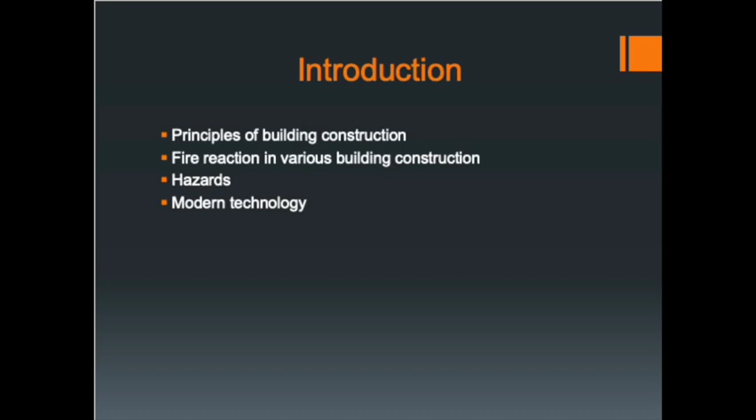So a few things we're going to cover during this PowerPoint are the principles of building construction, how a fire reacts in various different types of building constructions, the hazards involved, and then just some simple terminology to help you understand the language when we're dealing with building construction.

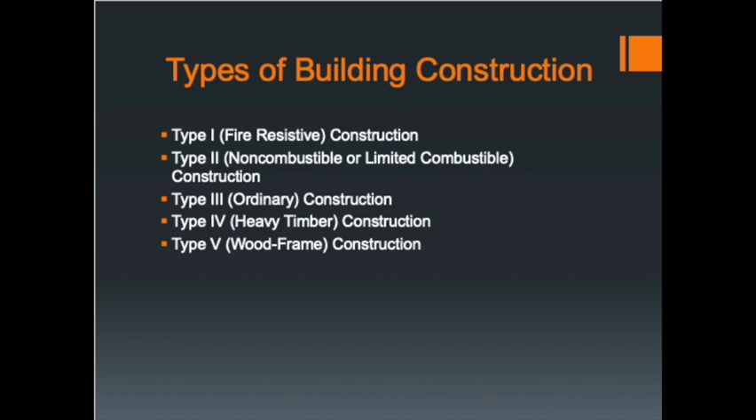So there's 5 types of building construction. Type 1, your fire resistive construction. Type 2 is your non-combustible or limited combustible construction. Type 3 is your ordinary. Type 4 is heavy timber, and type 5 is wood frame construction.

So your type 1, fire resistive construction, in town, these are going to be your high-rise buildings that are newly constructed. Everything in the building will be some sort of fire resistive construction. There will be no wood in the structural members or any of the frame of the building. Everything will be metal, concrete, steel, non-combustible components will be a part of this building.

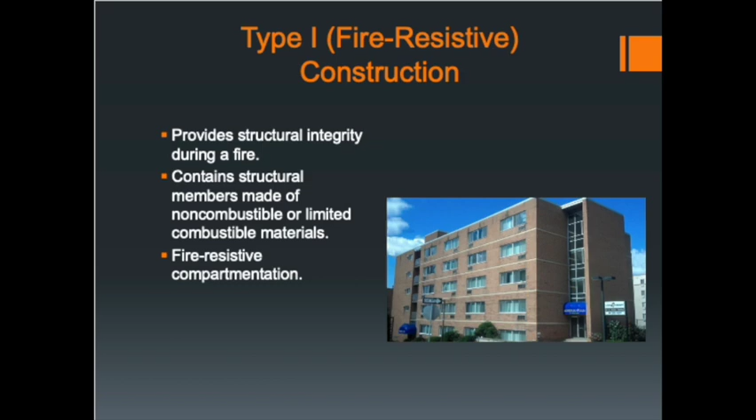So the only real hazard is what the occupants bring into the building. Those combustible members will be the contents that each person brings into the building: furniture, clothing, supplies, whatever the case may be. So with a type 1 construction building, it does allow time for the occupant and the firefighters to get into the building, get out of the building, combat the fire. Type 1 really helps with preventing the spread of fire horizontally or vertically.

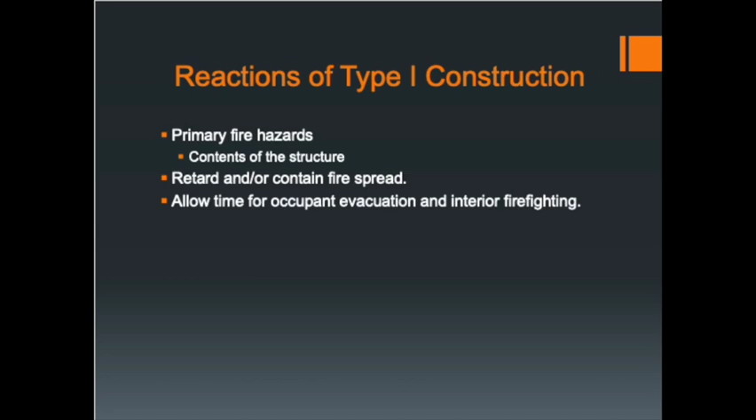So type 2 construction is your non-combustible or limited combustible construction. It is similar in materials that are used in it to type 1 construction, but there's just a lower level of fire resistance on the type 2. It could be from a 3-hour to a 2-hour fire rating, or from a 2-hour to a 1-hour fire rating, just things like that. They may use different materials within the building that will not withstand fire for extended periods of time.

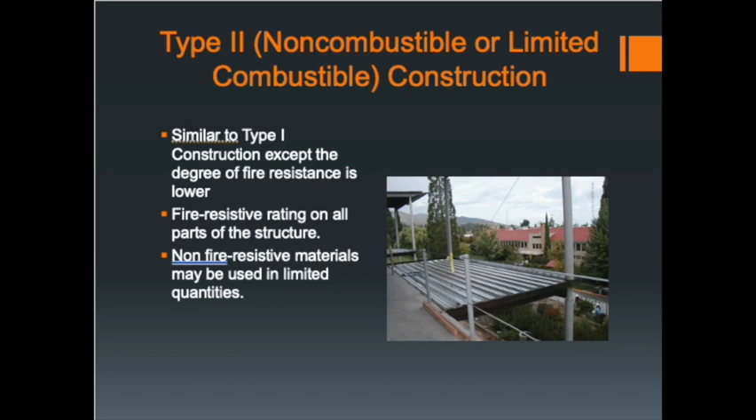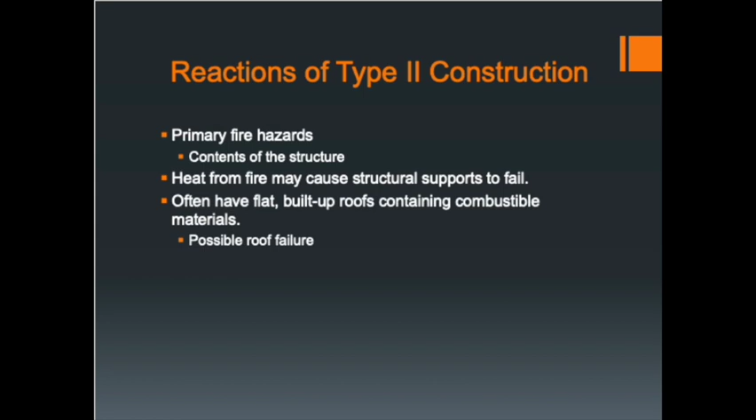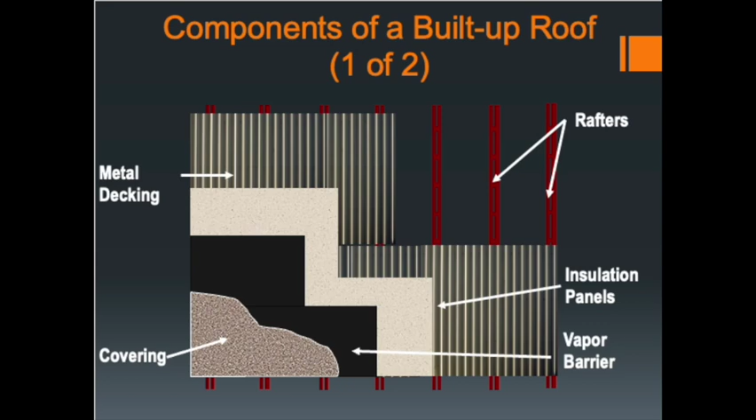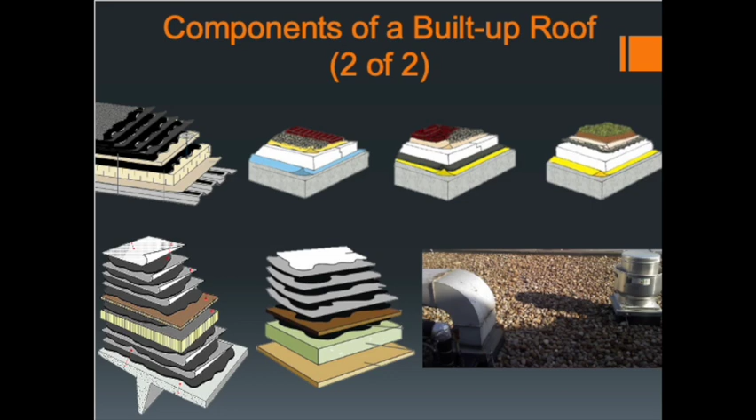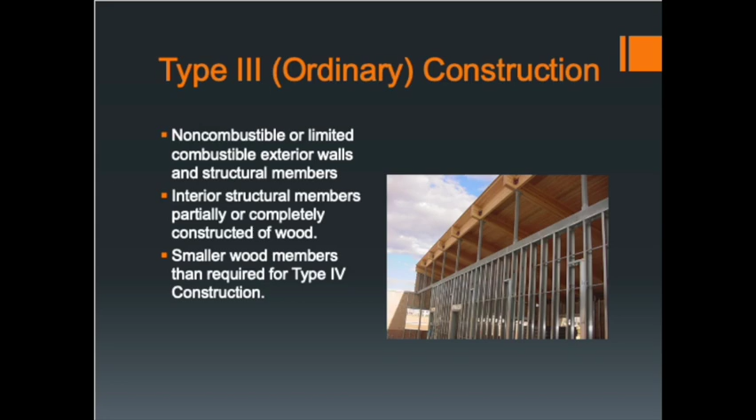So type 3 is your ordinary construction. This is what we're going to have downtown. They call it a taxpayer, which is business on the bottom on the first floor, and then you're going to have your residential living spaces on the upper floors. These are typically a non-combustible exterior and structural members. So the outside and the things that are holding the building up are going to be concrete, steel, metal, masonry, but the interior walls, the partitions are going to be made out of wood. Like I said, most of downtown is going to be this type of construction.

So with type 3, because now you're using wood, different types of materials, you're going to have a greater chance for concealed spaces, which we all know gives you smoke, fire, heat spread rather quickly now. Makes it easier for that nasty stuff to move throughout the building.

And then also the contents inside the building and the stuff that the tenants and occupants bring in is going to be combustible.

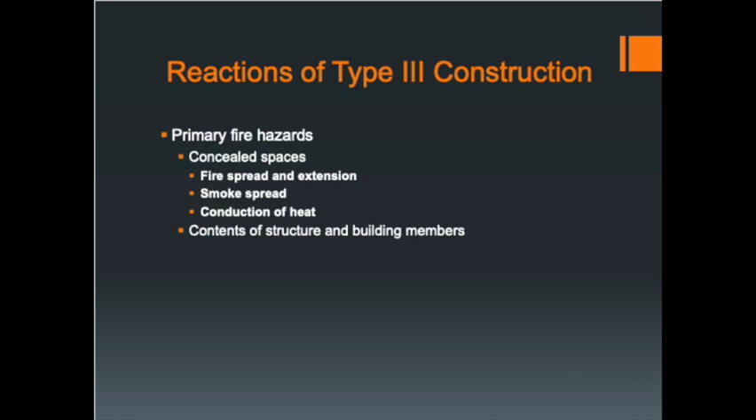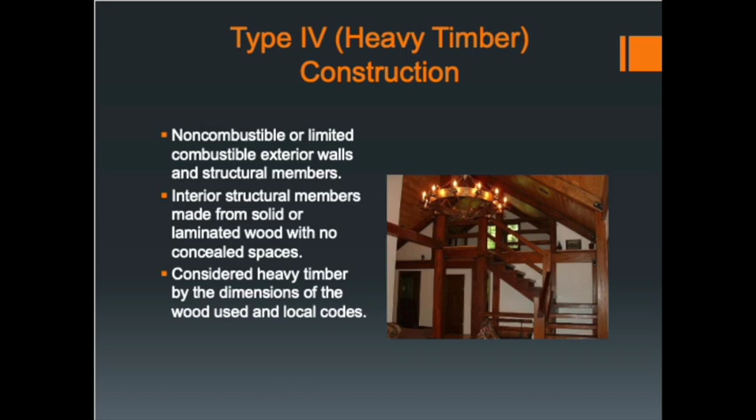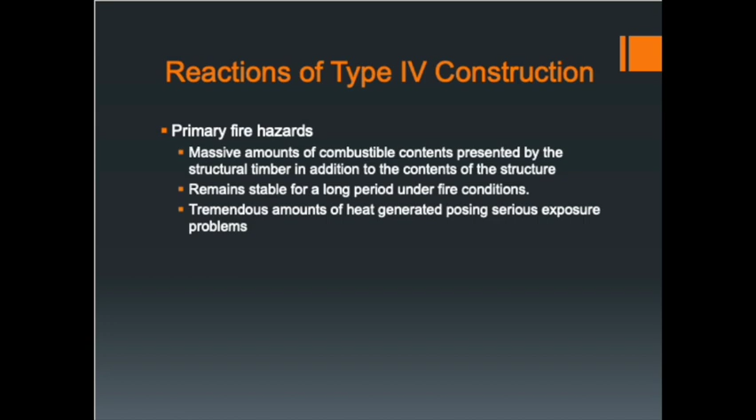So some primary fire hazards in type 4 construction. You're going to have a ton of combustible contents in the building. Structural, non-structural members. There's going to be a lot of combustible materials. Because they're so big, they're so bulky, they're built to withstand the loads. They do remain stable for extended periods of time under fire, but they're not non-combustible. So they will get to a point where things will start to burn and break down.

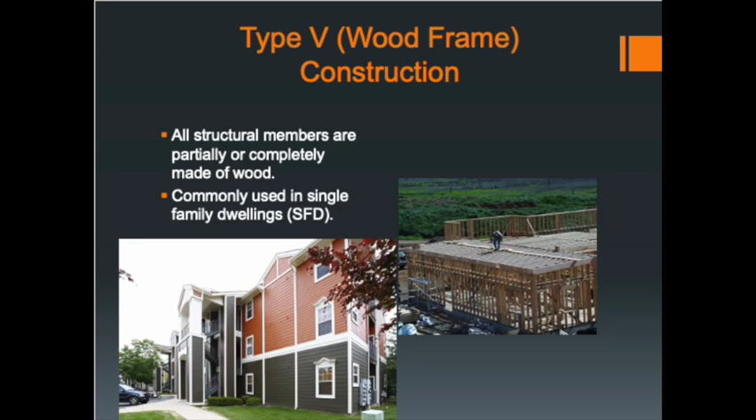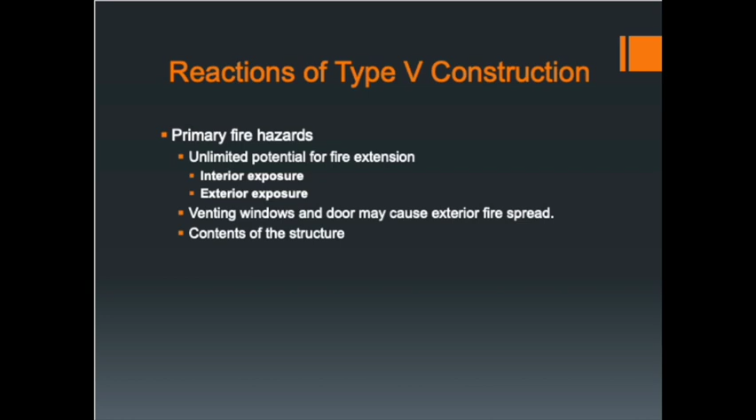So majority of them are going to be unprotected materials. You have ample amount of fire spread opportunities, interior and exterior. Windows, doors, these things will not be rated. And then obviously the contents as well as what the tenants and occupants bring into the building are going to be combustible. So everything that's within this building is going to be combustible, and this is where we see most of our fires and most of our significant fires.

So some common materials used in construction. We've all seen them in town. We've all been to buildings where they've had this type of material: wood, masonry, cast iron, steel, reinforced concrete, drywall or gypsum board, and glass, fiberglass.

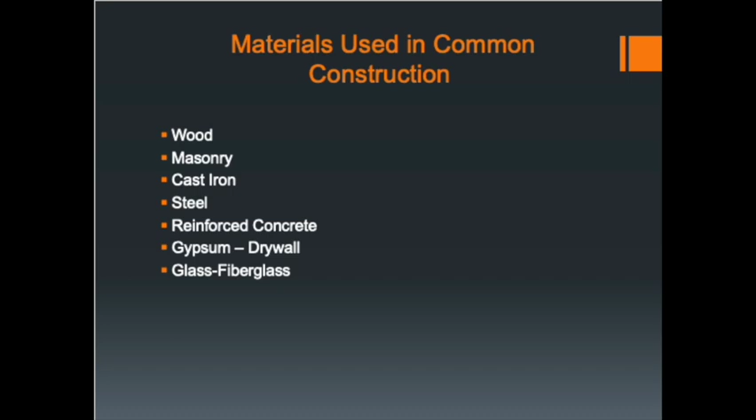So for wood, you can have load-bearing or non-load-bearing walls. Load-bearing walls are transferring weight vertically throughout the building. So obviously if we remove one of these walls or a portion of these walls, something catastrophic could happen. So we need to really pay attention to what walls we're breaching through, things that we're cutting, to make sure we're not making the situation worse for us.

So to go back to that, the 1 and 2, it just shows the standalone platform or may adjoin different structures as a party wall. So on the left, you may have just wood sitting on a wall, or you may have two walls or two boards coming together on that wall to create one continuous.

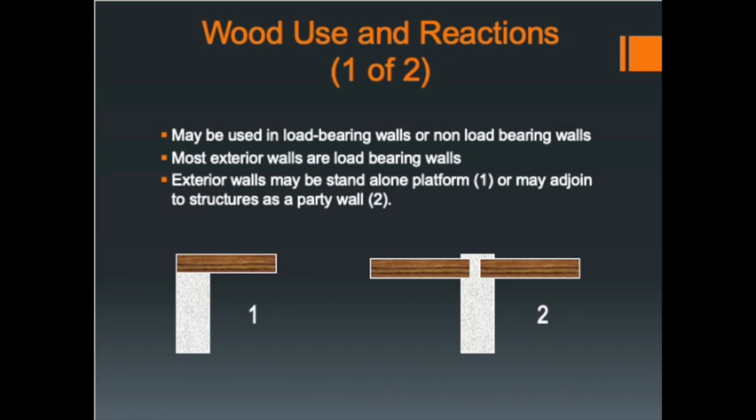So the way wood reacts in a fire, it comes down to the size of the lumber, whether it's a true nominal board or a sawn piece of wood, and the moisture content in the wood. There's a minimum moisture content for it, which is irrelevant, but the more moisture is in the wood, obviously the slower it's going to burn.

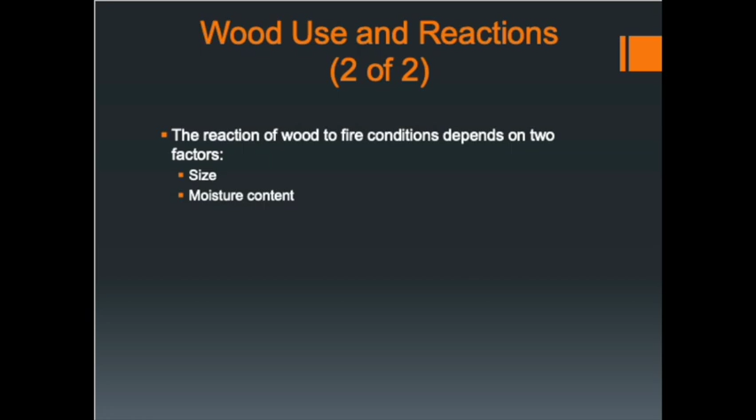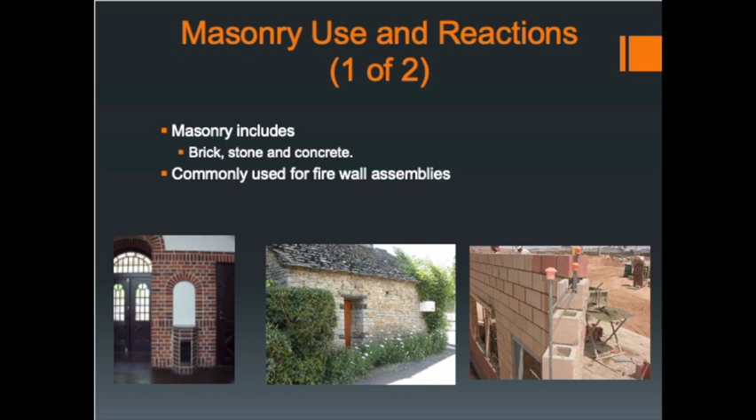So masonry, these could be brick, stone, concrete. In townhouses or older homes, row homes, they'll have a firewall that's built with concrete, and sometimes you'll see it extend past the roof line, separating each dwelling from each other. And they could be bearing outside walls with brick or concrete.

So because these things are allowed to be used in fire-resistant buildings, they can withstand higher temperatures than other materials, but you need to recognize the signs of when they're starting to break down. Like bricks, they rarely show loss, but they will start to crack, start to deteriorate, or they just will fail instantly.

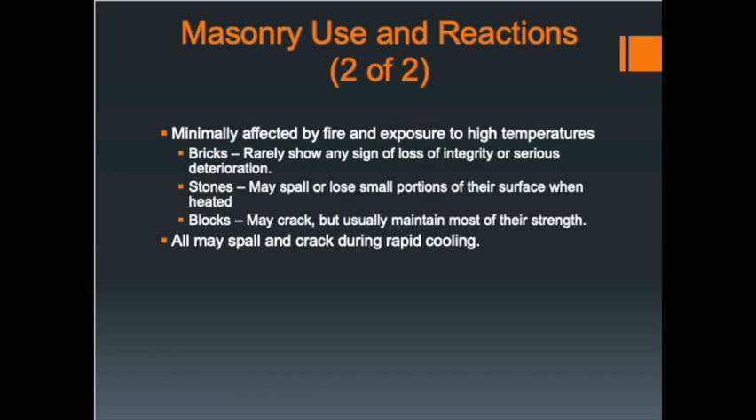Stones and blocks, both will start to spall or crack. They usually maintain their strength, but then once that happens, once the spalling and cracking happens, you need to be aware that there could be a failure coming soon.

So cast iron is found in older construction, used on veneer walls and exterior wall coverings. Masonry is generally in the area of the covering, so this would be your decorative outside items. An example of that is a rec hall - the bleacher supports and concession stands are cast iron. That's really about it; I haven't seen much of this in town other than some decorative items.

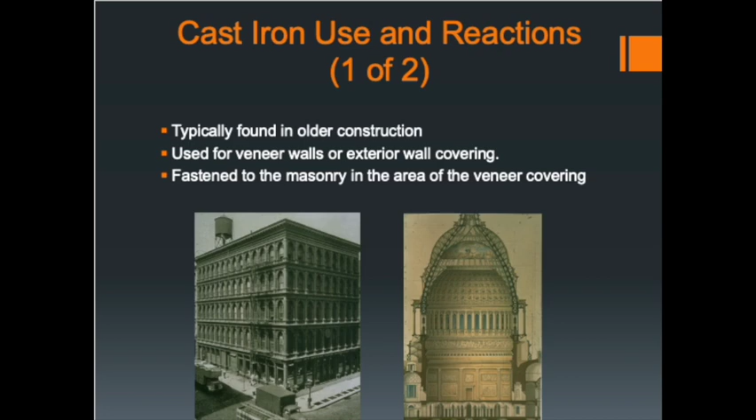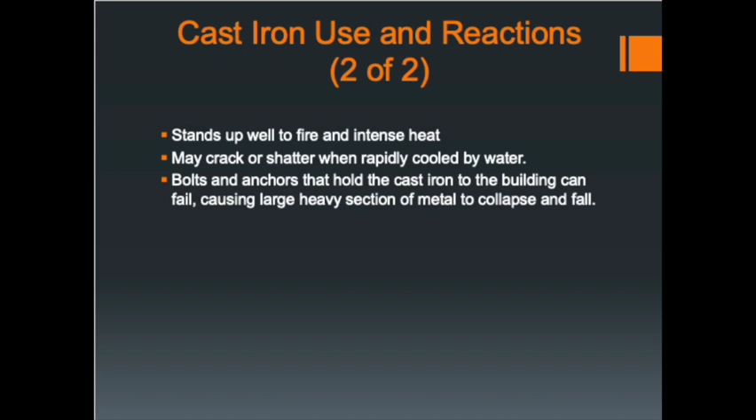It stands up well to fire. Cracking and shattering when we apply water after it's been introduced to heat could potentially happen. And bolts and anchors that fasten the cast iron to the building can fail. We all know attachment points are going to be our weakest point on most everything, because you're putting a hole through something that maybe wasn't meant to have a hole. So they're just things you need to pay attention to.

So steel - we see steel going up in town all the time on all these buildings. It's a good material to be used for structural members.

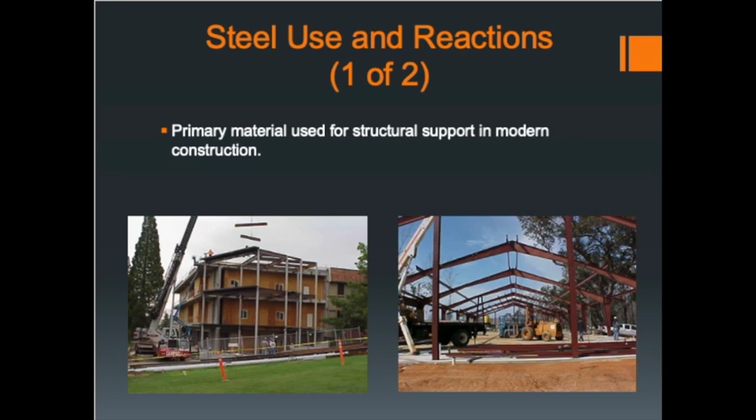Steel beams elongate when they're heated, and it's not necessarily equal elongation. It could be on one side four inches and nothing on the other, or three inches on one side and one on the other. So it's not a constant elongation. But know that because it is steel, it still has a threshold where it cannot withstand anymore.

And once that steel elongates, it's not going to come back to its original size. Like the picture on the bottom right, if the steel is up against a brick wall that is a structural member, the steel beam will expand, and it will expand through the brick wall.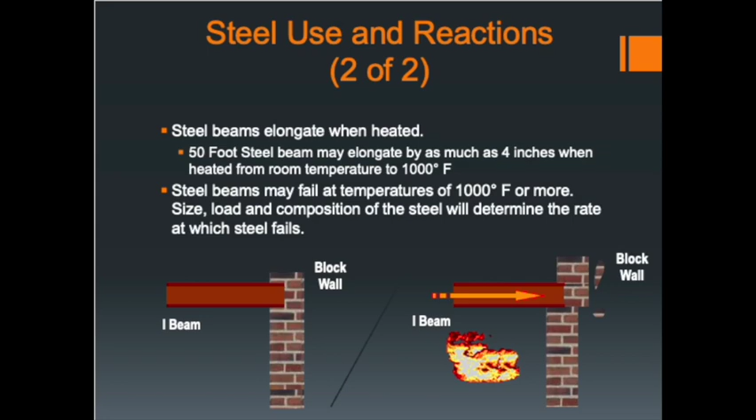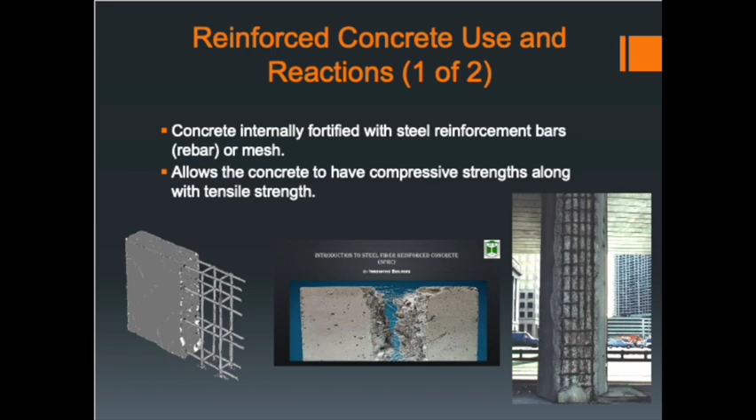So reinforced concrete uses - we see concrete throughout town in structural members, posts, columns, floors. It's usually reinforced with some sort of steel or mesh; they could use other types of materials like rebar. This allows the concrete to have compressive strength along with tensile strength, so it's not just going to be regular concrete - there's going to be some sort of material inside it to give it that strength. Like earlier, concrete will spall and crack, and when that starts to happen, it means the concrete is losing strength, and there potentially would be a failure under fire conditions.

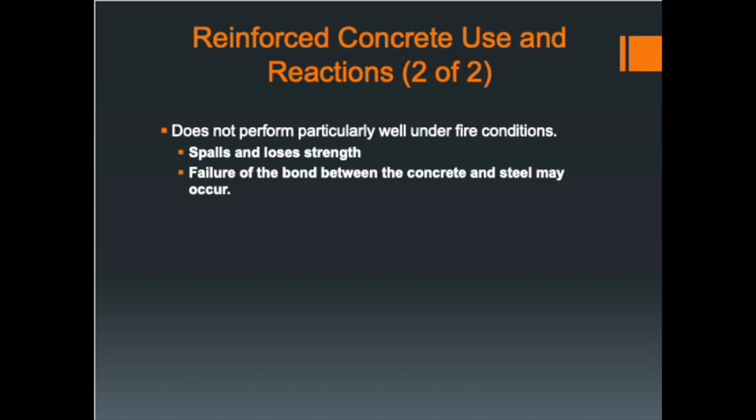So gypsum board, drywall, has a high water content. We went back to the wood where we were talking about the moisture level in the wood. We're going to use the gypsum for insulating steel - maybe they need to wrap something to make it more fire resistant and not have it exposed. So if you have a wood structural member and you wrap it in gypsum, that will allow it to withstand more time in fire conditions.

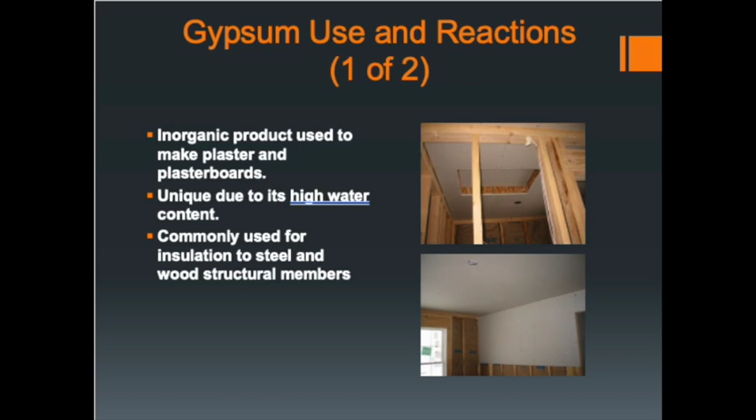So it's a good heat resistant or fire retardant material. There are multiple different types of gypsum out there. You're not going to know what type is what during an overhaul situation or fire condition, but just know that there are multiple types and they can withstand different temperatures, different hose streams, and so on.

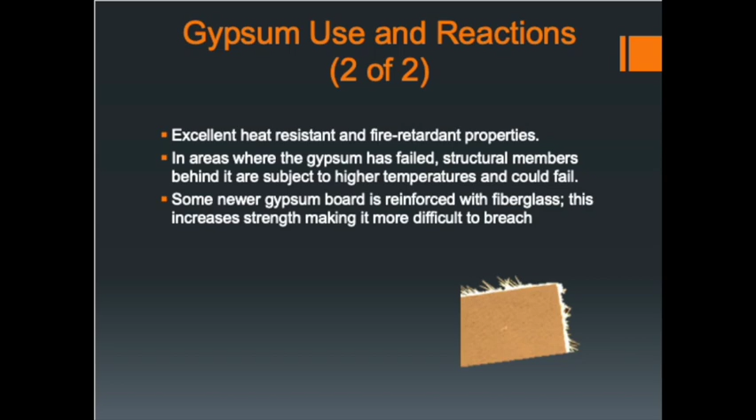So glass and fiberglass, use and reactions. Glass is usually not in a structural capacity. Glass can be safety rated, but that is not structural - that's just preventing injury from sharp shards or somebody falling through the glass. Used on windows and doors. But conventional glass, like your double hung windows in a residential home, is not meant to prevent fire spread - they will fail under fire. Everybody's been to a fire that has seen windows fail. So your conventional windows in your homes will not prevent fire from getting through them.

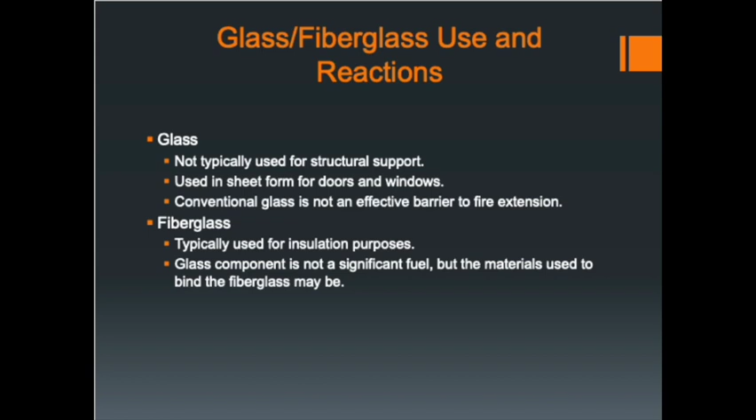Fiberglass is used for insulation purposes. The glass component is not a significant fuel, but the material used to bind the fiberglass may be. Fiberglass batt insulation usually will just sit there and smolder. The paper on the outside is usually what will burn and cause fire to travel to areas it originally wasn't in.

So just some hazards associated with building construction - we need to know, as firefighters responding to different types of buildings, to recognize what type of building we're dealing with. Not get real specific on all the details, but just know, okay, we're going to have some time for this one because it's a type 1 building - it's meant to be fire resistant. There's a big difference between that and a single family home where time is of the essence.

So that comes into your size up and communication. Communicate everything that you see about these buildings, conditions changing. You start to see these signs that we talked about with these materials - relay that to the incident command and the rest of the crews to prevent further injury. Don't ignore these signs, because you picking that out may save a life.

So additional critical issues: recognize building conditions, recognize the conditions that may contribute to fire spread, and recognize conditions that could potentially cause the building to fail. Let somebody know those conditions if they're changing rapidly - let them know your findings. Because a building can, in a second, just start falling apart, and if these signs weren't recognized by anybody, we're potentially going to have injured firefighters.

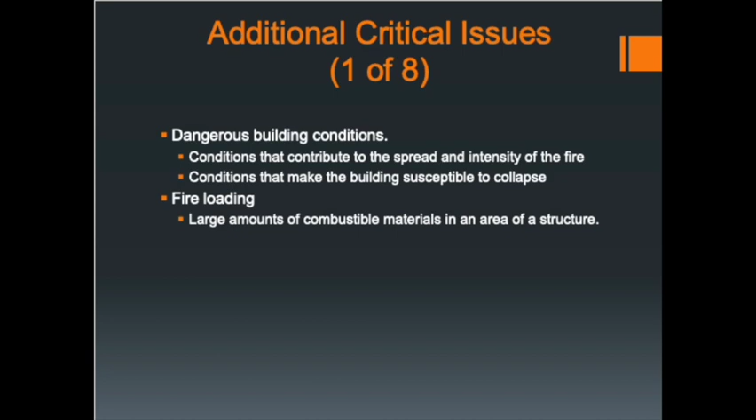So all your combustible furnishings and finishes, a lot of tapestry on walls, things that aren't supposed to be on the ceiling. This is why we don't want fires to spread across the ceilings, and why we don't want things hung on the ceilings, because fires will spread across the ceiling faster than they normally would have.

Be aware of your roof coverings. There's all sorts of roof coverings in town: wood, composite shingles, tile, slate, asphalt. You're going to have terracotta, you're going to have stone. So you need to recognize those from the ground.

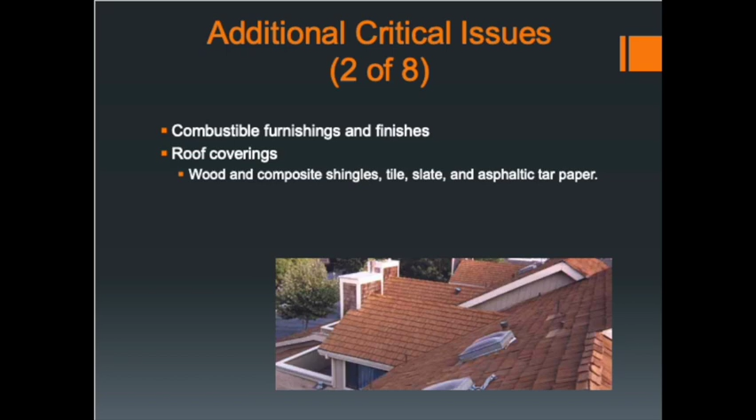And if you're riding the roof seat, or you're an operator that gets assigned to the roof, you need to recognize that, okay, I need to take a different saw. Maybe I need to take a sledgehammer and hit some of the slate pieces off to gain access to the wood decking underneath to make my ventilation cut.

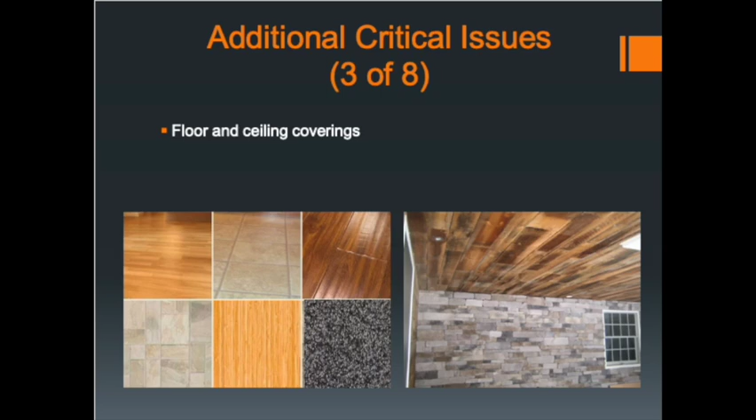So there's multiple different floor and ceiling coverings. Everybody now potentially could be using materials on the floor that's the same on the ceiling. So just your normal drywall walls are becoming a thing of the past. Everybody's a DIYer and is using all sorts of materials to make their place look internet pretty.

So building collapses, like I said, cracks, separations, things that don't look right to you, you're generally on the right track. If something doesn't look right, it's probably not right. If you have bricks falling off the building, stones falling out, mortar coming out, things appear to be leaning more so than normal, bows in the roof, you need to radio these things to command so they can let the interior crews know that they potentially have a catastrophic failure coming their way.

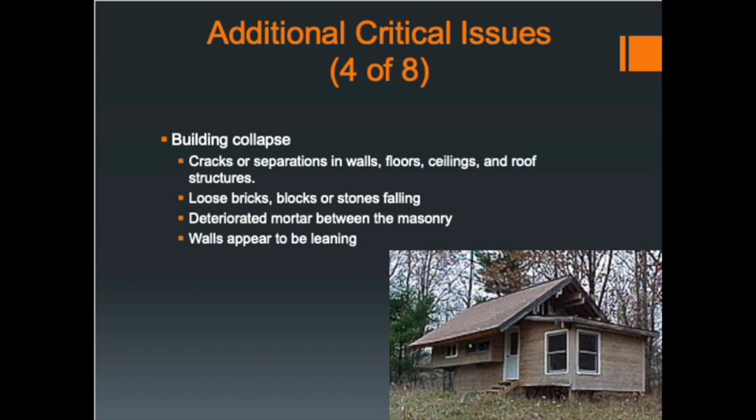So a couple other points: structural members that appear to be distorted. If you have tie rods or stars like in the photo, they're just holding everything together. That's not saying that this is a bad building - they are meant to just hold everything together structurally. Any noises, unusual cracks or creaks, or anything out of the norm, you need to let somebody know that something is happening, and we potentially need to get our firefighters out of the building.

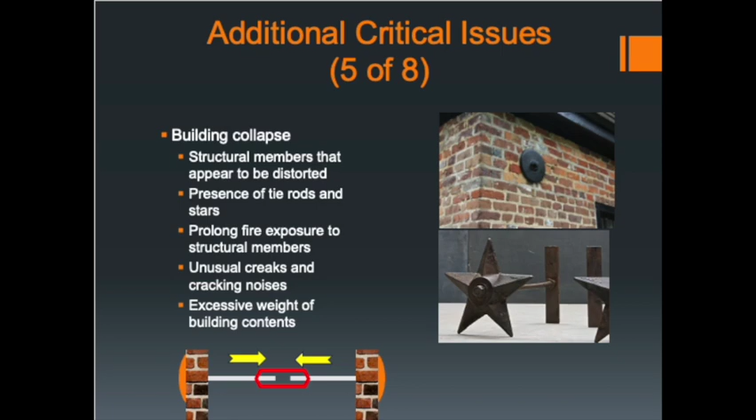So the collapse zone, a good rule of thumb is 2 times the height of the building. You can condense it to 1.5 times if you don't have the distance to go out, but a good rule of thumb, 2 times the height of the building is a good number to stay at.

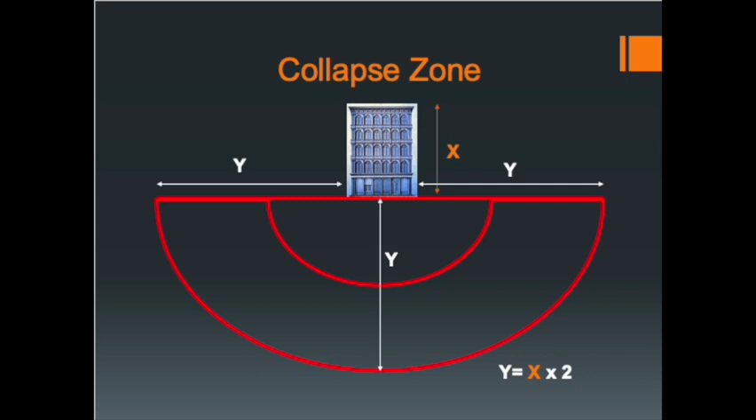So roofing hazards, especially in these Type 5 construction buildings, there's a lot of gusset plates being used. A gusset plate is a pre-engineered piece of metal that the truss gets put together with. All these little plates get pressed in place on these trusses, and then they get put up. There's no nails connecting any of them - they're just pressed in place.

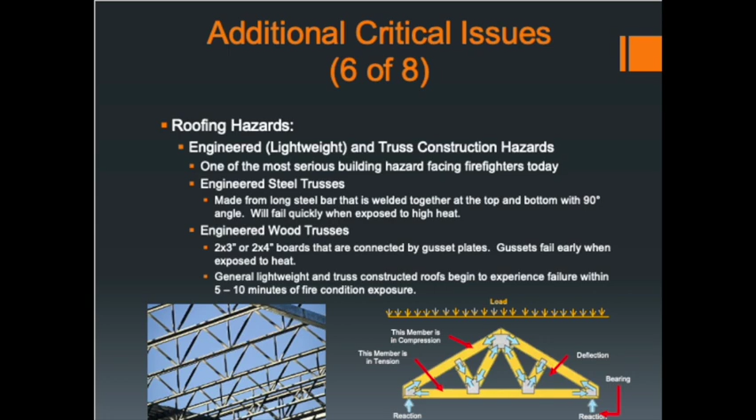So these trusses could be 2x3, they could be 2x4s, not real big wood, and you have minutes before these things start to fail under fire conditions.

So your floor joists, your engineered stuff, truss construction - you're going to have wooden I-beams, which are in the middle of the left picture. You're going to have laminated beams, which are also in that left picture. The I-beams obviously look like an I. You're going to have truss construction for floor joists, engineered stairs. So the web joists in the middle there, a lot of times they'll be protected by being wrapped in drywall if they're exposed in a basement. That I-joist is not very thick - it's plywood in the middle with probably two 1x2s that are sandwiched on each end.

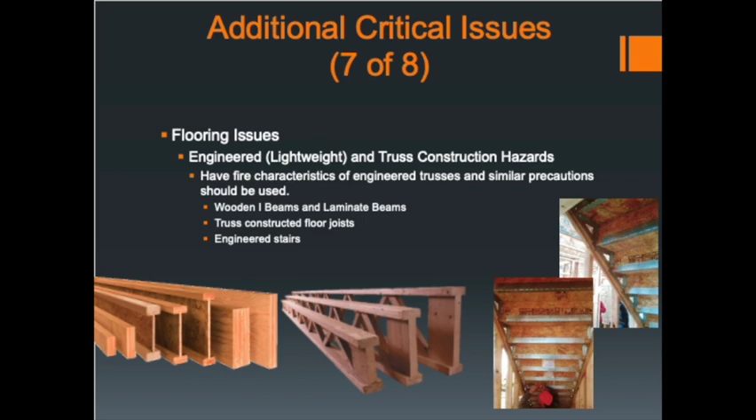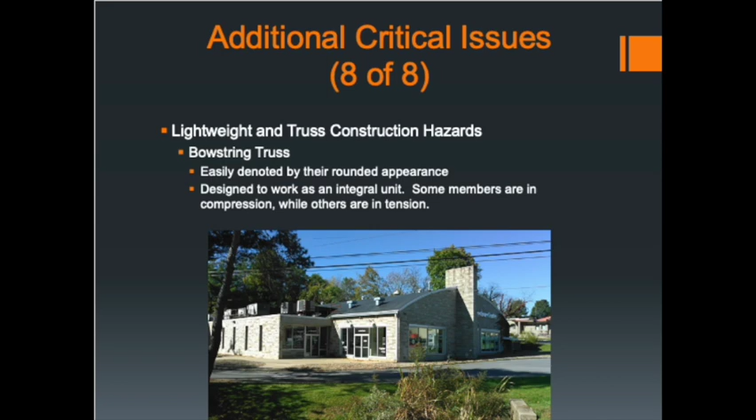So your bowstring trusses - this building's out off of North Atherton Street, so we do have these in town. There's just a lot of weight going across that long span, so these are things you just need to consider. And accessing that roof, obviously there's no roof ladder going to be used because it's a continuous loop. So these potentially could be a dangerous situation, especially with the amount of weight that they're holding up.

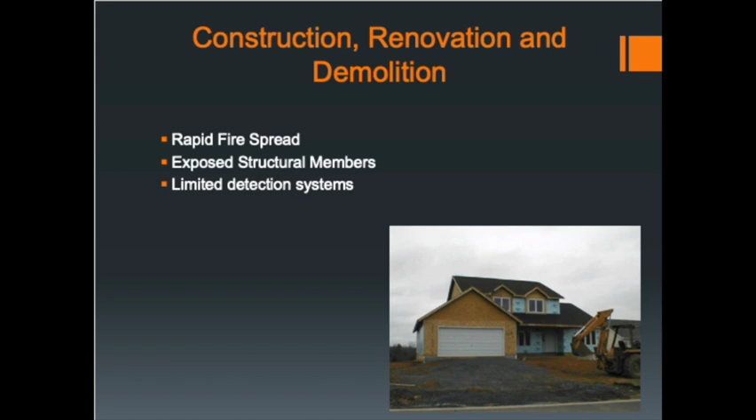So during construction, there is an issue for fire spread because a lot of these safety features aren't in play yet when something happens. There's not going to be any smoke alarms, anything like that. So really weigh your options responding to a building that's under construction for a fire. Is it really worth what we're about to try to go save?